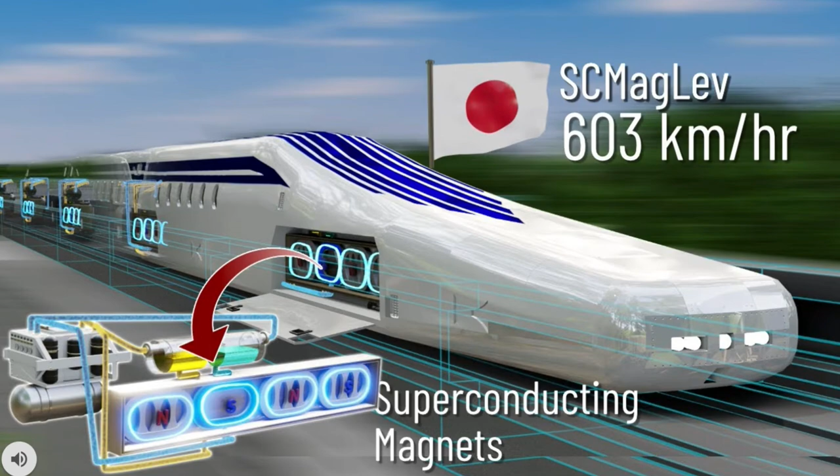On this next slide we have a simple image of a maglev train. This is the SC maglev train, a new maglev train opening up in Japan in 2027. You can kind of see the superconducting magnets and so on. This is just a high-level overview diagram. We'll go into more details on how the magnetic levitation trains actually work in the next slides.

Now we'll answer the question of how maglev trains actually work. Essentially, they have magnetized coils along the track that repel the magnets attached to the undercarriage of the train, and that's what causes it to levitate. The magnetized coils along the track repel the magnets underneath the train, causing the train to float in the air. Once the train is levitating, the electric current supplied to the magnetized coil along the track is alternated at a certain frequency, creating a periodic shift in magnetic field polarity.

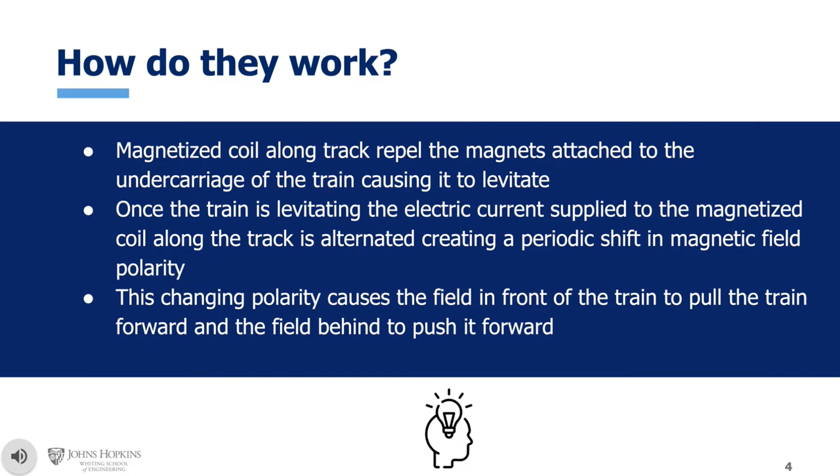This changing polarity causes the magnetic field in front of the train to pull the train forward, creating an attractive force in front of the train that pulls on the magnets on the undercarriage, pulling the train forward. Behind the train, that alternating field creates a force that repels or pushes against the magnets underneath the train. This propels the train from the front and the back, which is part of the reason they achieve such high speeds.

On this next slide, we see a simple diagram of what I just explained. On the left we see the levitation of the train: the magnetized coils underneath the train repel or push up against the magnets attached to the train's underside, causing the train to get pushed upward and float some distance above the track, about 4 inches typically.

Now, on the right, we see how the train is propelled. The alternating magnetic fields along the coil or track pull on the north pole of the magnet on the underside of the train, and behind the train they push against the magnets. This constant pushing and pulling produced by these alternating magnetic fields is what propels the train forward.

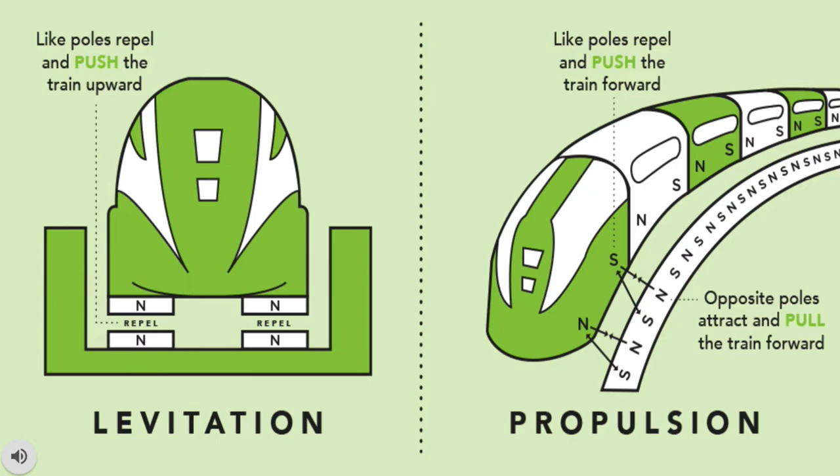Now that we've talked about what a maglev train is, let's talk about some of the positives. First, since magnetic trains operate on the concept of magnetic propulsion, they don't have a motor or an engine or anything like that. Since the propulsion system is electromagnetic in nature, there's no carbon monoxide or carbon dioxide emissions, so it's very green.

In terms of energy consumption, maglev trains are actually much more efficient than traditional trains, and once again that's primarily the result of the fact that magnetic levitation trains float, so they see less friction, meaning it takes less energy to propel them forward.

In terms of noise pollution, once again the train has no contact with the track, and since it's floating in the air, there's very little noise. So for people living around maglev trains, it's actually not as bad as it is for a traditional train.

In terms of the amount of land it takes to set up a maglev train network, maglev trains actually don't require as wide tracks. They only have a 12-meter wide dual guideway instead of the traditional 14 meters required for regular trains.

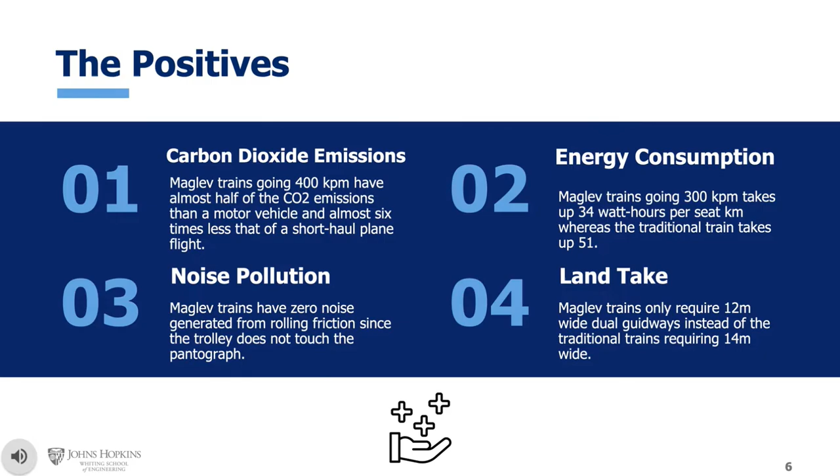Some additional positive benefits of maglev trains from a cost-benefit analysis: since the train floats and doesn't actually touch the rails, the mechanical wear and tear of the different parts on the train happens much less quickly, so maglev trains have much lower maintenance costs than traditional trains.

In terms of comfort, the absence of rolling friction on the tracks creates a very comfortable experience for passengers. There's no vibrations, no loud noises, and so on, making it a very comfortable and smooth ride.

Now, due to the way magnetic levitation trains operate, the chance of a derailment is actually very low, especially in most weather conditions.

This is a result of the fact that the train itself floats above the track. However, the magnetic fields generated by the coil actually keep the train on the track, making it very hard for it to derail outside of very unique conditions or extreme circumstances.

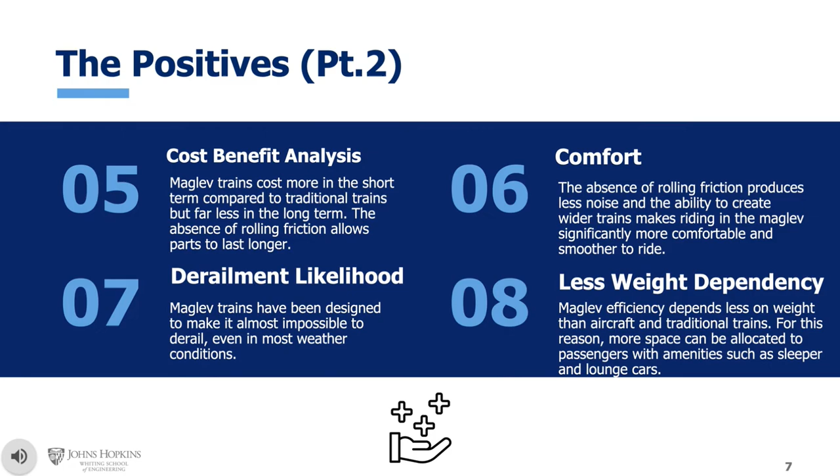And finally, in terms of magnetic levitation, trains have less weight dependency. For this reason, more space can be allocated to passengers with amenities such as sleeper and lounge cars. This is a result of the fact that magnetic levitation trains don't need to stay mechanically attached to a track, right? They can float above the track. This means they don't need to be as heavy in order to ensure there's no derailment. Regular trains have to be a certain weight, or weigh a certain amount, in order to ensure that they stay on the track.

Now, naturally, as with any technology, maglev trains have certain downsides. Some of those downsides include the incredibly high upfront costs for setting up a maglev train network.

In addition to that, there are health concerns. Due to the presence of strong magnetic fields required to keep the train levitating and to propel it, there's concerns about how those might have long-term effects on the health of passengers and so on. A lot of this is still being studied and understood.

The other thing too is we say that maglev trains are green, but they're green with an asterisk, right? Because if the energy or electricity required to operate the maglev train is generated with fossil fuels, then that sort of defeats the purpose, doesn't it?

And finally, with those high speeds that maglev trains can achieve, there's also high risk, right? We mentioned that the chance of derailment and other such things, except in extreme circumstances, is very low with maglevs, which means in general they're very safe. However, because the train is floating and going so fast, in the event of a collision or derailment, the amount of damage and risk to human life is much higher just because of those high speeds and the fact that it's floating.

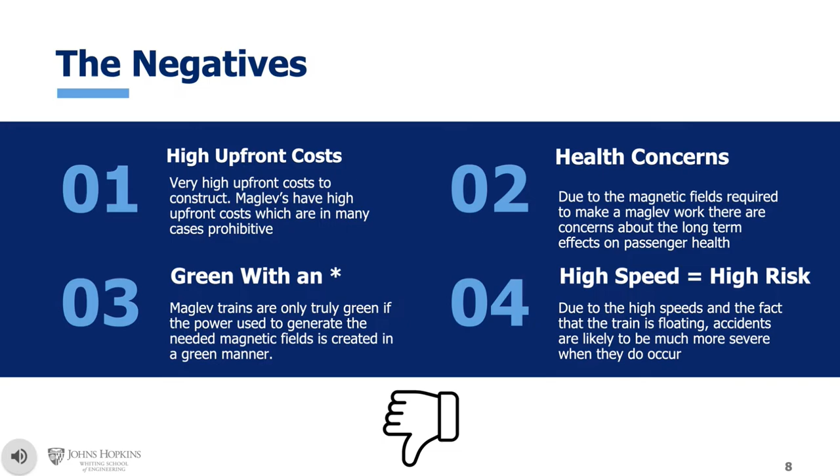So where are maglev trains currently being used? Are there any commercial lines currently operating? In fact, currently in the world there are 6 total commercial maglev trains in operation: 3 in China, 2 in South Korea, and 1 in Japan, with Japan expected to open one more in 2027. So you can see the technology is picking up in Asia, but unfortunately not as much in Europe or the United States.

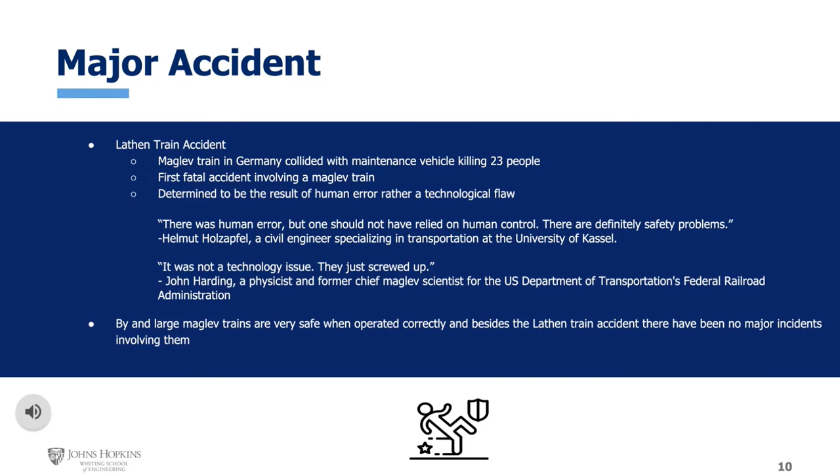It's also important to note that this was not a technological flaw but human error, right? As Helmut Holzapfel put it, who is an engineer specialized in transportation at the University of Kassel, this was human error and one should not have relied on human control in general. It's also important to note there are different variations of this system in Japan that reduce the amount of human error, whereas the one in Germany decided against that, hence the result of this catastrophic accident.

After our continuous and extensive research on maglev trains, we discovered 3 particular hazards that we decided were the best and most beneficial to elaborate on. The first was unexpected power loss. The second was health concerns relating to individuals with pacemakers and how external magnetic fields outputted from the train can affect them. For the third, obstacles ending up landing on the track itself.

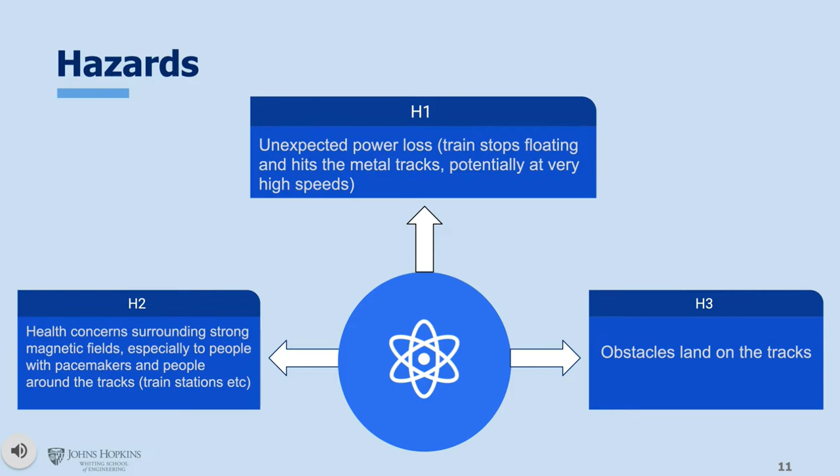If you do a little research, you'll discover many developers of these maglev trains and researchers from different universities have concluded these trains are almost entirely impossible to derail and can withstand almost all weather conditions. But on the off chance an obstacle lands on the track, that could potentially be extremely detrimental to the train—how can they avoid this hazard? We're going to get into these three coming up next.

The first hazard we will discuss today is regarding unexpected power outage occurring while the train is in transport. Maglev trains will still remain afloat even if electrical power is reduced. The electrical current is created between the oppositional magnetic field between the magnets, and that slowly reduces when electricity is shut off—it does not come to a complete halt very abruptly. As it comes to a slow stop, the wheels on the bottom of the train will glide with the track. As you can see in the diagram to the right, it shows how such an event is controlled.

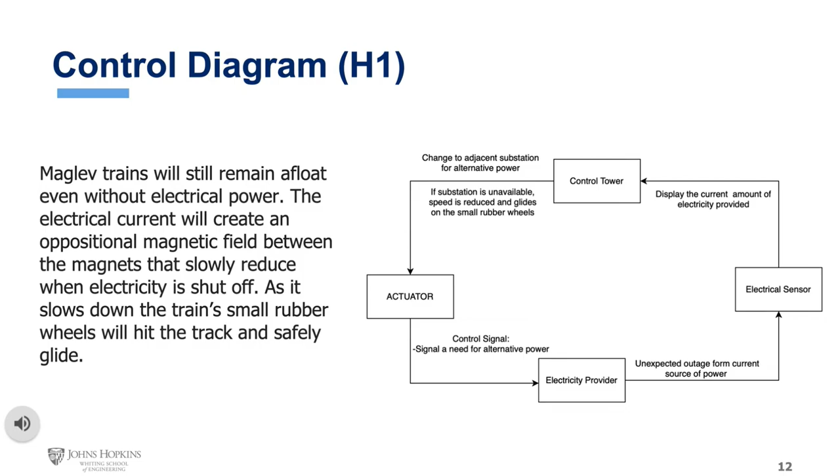So for the second hazard, if a cardiac rhythm device such as a pacemaker comes in contact with an external magnetic field, could it potentially bring a disruption to the individual? Most modern day pacemakers contain a switch that closes if an external magnetic field around 0.9 millitesla is applied. The switch then turns the device to a programming mode with asynchronous pacing. This isn't too worrisome, but it is something to be noted.

Luckily, the field within or outputted from the maglev trains are around 100 microteslas, so it is extremely far from causing a reed switch within these devices. Of course, the makers of maglev still recommend you see your cardiologist and get approval beforehand. And it's worth noting that if your pacemaker is MRI safe, it is almost entirely perfectly safe to aboard these maglev trains.

This is, of course, with the assumption that the train's magnetic field has been thoroughly tested, and that testing situation has been displayed on the right on the control diagram listed. You can see how the human operator in the control tower detects the magnetic field and determines if it is fine or if it is detrimental to individuals with pacemakers, and how they will proceed forward.

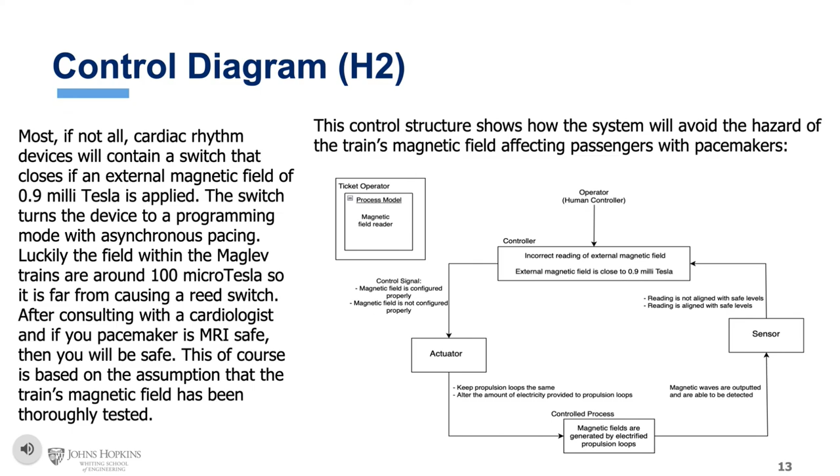Now for the third hazard: if an obstacle has landed onto the track on which the train is moving, how will the hazard be prevented? There are current sensors and video cameras installed on all maglev trains that detect if an obstacle has been placed onto the track and determine if it is severe enough to result in the train stopping or continuing towards its destination.

As you can see on the right, it shows the process on how that is conducted. And on the left, you'll see from fellow civil engineer from the University of Kassel, Helmut, who said any obstacle on a maglev track presents a problem - the heavier the obstacle, the bigger the problem. It's just simple physics. It's completely true.

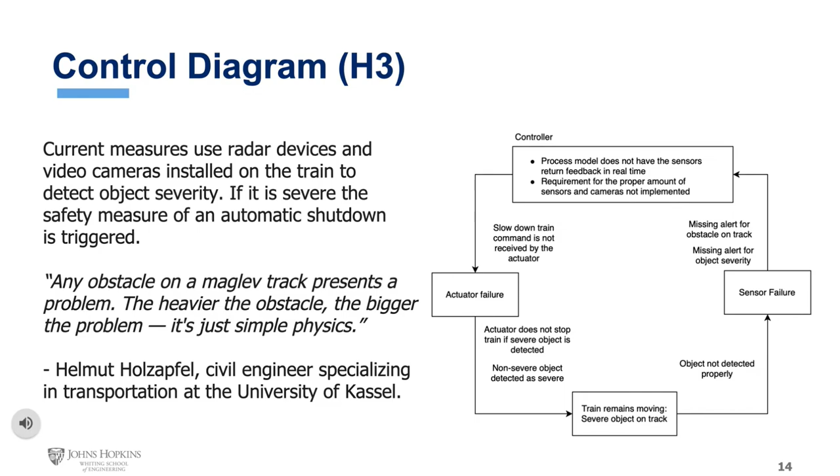Even though most researchers and developers of the maglev train are extremely adamant that it's almost impossible to derail this train and that it can withstand almost all weather forces, there still is the possibility of an object landing on the tracks. And if that very rare situation occurs, there still needs to be a plan in place on how to detect and work around it.

One of the biggest aspects of the production for these trains is its autonomous features. Even going down to how it accelerates and decelerates, it is manned by an external control tower instead of having individuals within the train itself. As you can see on the right-hand side for this activity diagram between the control tower and the maglev train itself, it shows how it is determined to either accelerate upon departure or decelerate upon destination arrival, and how that is done thoroughly and safely.

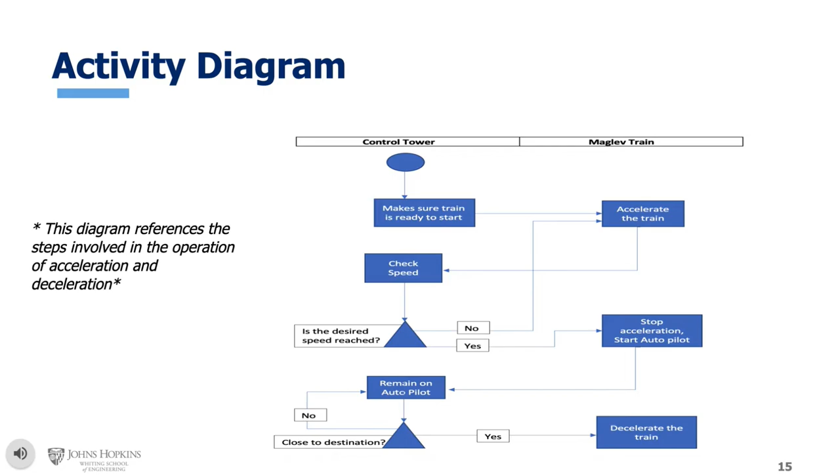The socio-technical impacts involved within the development of this maglev train are nothing shy of complicated and extremely intricate. It goes all the way down from who is going to be funding this project, whether it's a government entity or private entity, down to getting approval from the government in which it's being produced in, if the people where the town is being produced actually approve of it, and the infrastructure needed to go forward with it. So there are many aspects involved.

We're going to use JR Tokai's Tokyo to Osaka maglev line, for instance. The people of Osaka were all happy by majority vote. They not only wanted the train to be developed, but they wanted to rush the process of developing it.

During the whole development process, the executives of JR Tokai were in meetings with government officials on a constant daily basis, going through production details, making sure that political entities weren't going to be a major influence in the process of its development, and understanding how they can use the fiscal spending of the government towards their own benefit.

As far as the socio-technical impacts go for the operations of the maglev train once it's been properly developed, there needs to be constant feedback on all levels within the hierarchy. The train itself needs to be providing constant feedback to the control tower. The utility company that provides electricity to the train also needs to be providing feedback to the control tower. This is extremely important, as the control tower decides whether the train is accelerating or decelerating, and if there need to be any solutions or maneuvers in the event of sudden power outages.

So constant feedback is extremely important throughout the entire system. Let's use the Shanghai maglev train for a quick example. It is currently the world's fastest and oldest commercially used train in existence. It runs Monday through Sunday for majority of the day and has 6 maintenance checks that are around 15 to 20 minutes apiece. Now this line from city to city has a separate track that takes it directly to the maintenance facility and determines if a quick maintenance check is sufficient, or if something needs to be fixed and the next trip needs to be delayed.

The major benefit of using maglev trains in this situation is maintenance isn't as needed as traditional trains because of the lack of rolling friction that reduces the need for constant repairs and replacements over time, because the magnetic and electrical forces producing a levitational field for the train. The lack of rolling friction is an extremely beneficial aspect to the maglev trains and reduces the amount of maintenance and maintenance teams required to keep it up and running.

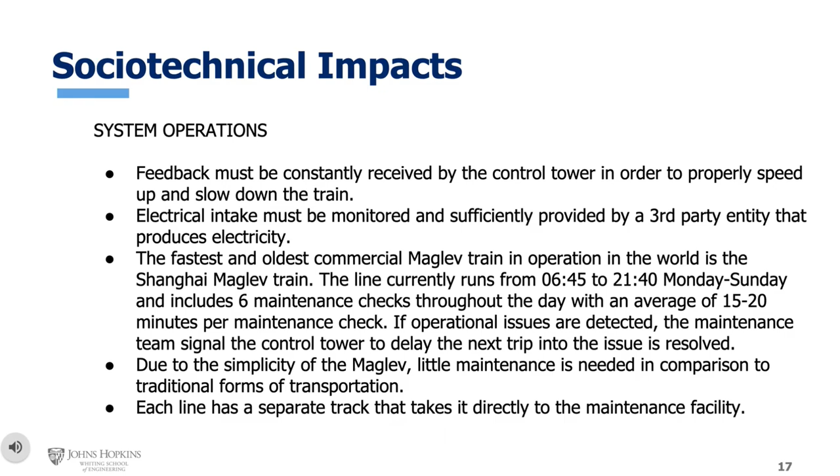So the future possibilities are extremely vast with maglev trains, especially in the United States. We need to break the chain of low expectations that we're currently dealing with regarding maglev trains and realize that other countries like Germany and Japan are using these trains to extreme benefits.

The whole purpose of maglev is to remove millions of people from their cars and fight climate change while doing so. There was a study done by NASA that showed the CO2 emissions in New York City from 2015 to 2019 and how it almost was reduced to around 95% during COVID. Now this is not to say that the construction of the maglev line will completely remove the pollution in comparison to that of the COVID era in 2020, but it does show the improvement there can be with a significant amount of car reduction on the roads.

So maglev can 100% be a solution to this issue. And it's currently known as the Internet of Trains, a newly coined term. It's completely fully autonomous. And I think future possibilities, not only in the United States, but in Japan, Germany, and other countries, as technology becomes more evolved with artificial intelligence and machine learning, there will be more sensors, predictive analytics, and big data integrated into the maglev system that could almost reach a 100% reliability rate. This type of central management system will maximize the amount of passengers, with operators only needing to simply alter the arrival and departure times, while the machine itself will take care of the rest.

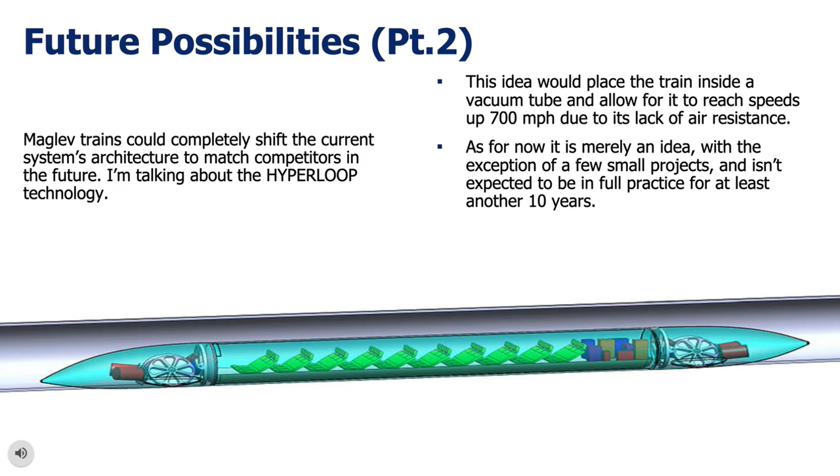So in terms of safety enforcement, or kind of what's going well, or how are these maglev train companies sort of accounting for the different hazards present, it was notable the extent to which they've really thought about how to mitigate some of the hazards that we talked about in this presentation, and some of the hazards that we perhaps didn't touch on.

As part of this presentation, we thought it made sense to include screenshots from some of the relevant sources so that we could make it part of the discussion. And so in the following slides, we'll go over some screenshots regarding the different safety features present on the newest maglev train that's going to be in operation in 2027. But I want to note that these features are also present in some form or another in current maglev trains. So without further ado, let's jump right into it.

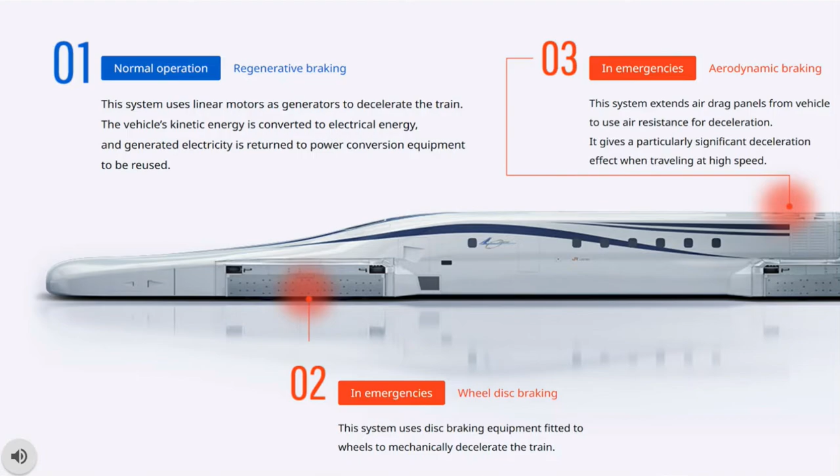In the case that a particular substation suffers an electrical outage and the train is not able to receive power from that substation anymore, there are alternative substations that can keep the train propelled or keep it levitating and keep that coil on the track energized.

As we touched on, in the event that all substations go down or the power just isn't getting to those coils, the train has rubber wheels to land on softly, and it can brake using the standard wheel disc braking that's common on most trains with mechanical coupling to a track.

Next we'll talk about a hazard we didn't really cover: what happens in the event of an earthquake or something like that, and the train starts getting vibrated or shaking. In this situation, even though the track underneath it—those magnetic coils—will be shaking because it's on the ground, due to the principles of electromagnetic induction...

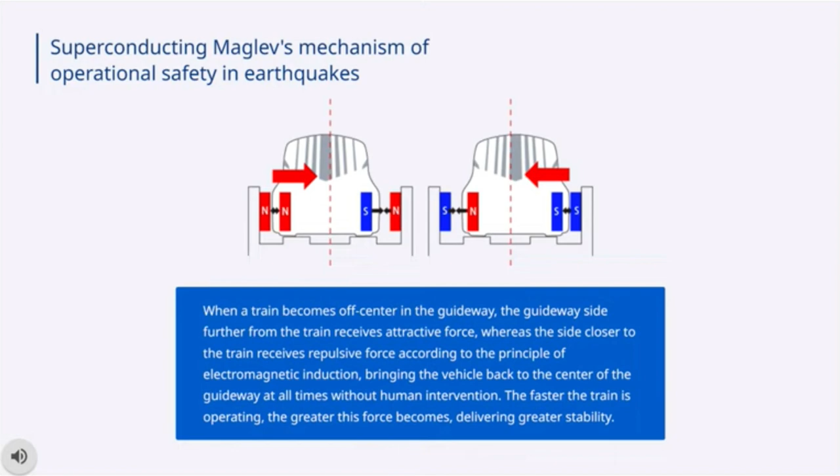In reality with maglev trains, there's actually a magnetic force keeping the train on the track at all times, which gets stronger the faster the train goes.

Now we'll take a look at gaps in safety regarding how safety is currently enforced on maglev trains, and how these companies have attempted to address some of the hazards we've already talked about.

It was notable that in studying this topic, we did not really come across any major accidents other than the incident in Germany, which we discussed earlier. That's notable because the oldest commercial maglev train in operation, the one in Shanghai, has been in operation for 20 plus years with no major incidents.

This fact does align with the safety analysis done by engineers and regulators, where maglev trains are consistently shown to be significantly safer than standard trains.

Despite this fact, maglev trains have seen very little adoption outside of Asia, primarily due to their high upfront costs and lack of regulatory certainty outside of Asia.

Maglev trains are, as we've mentioned, extremely expensive to set up front, with one estimate putting the cost at $50 million per mile at the low end, and up to $200 million at the high end. Maglev trains require significant upfront investment, and many countries have not been willing to put up with that high cost.

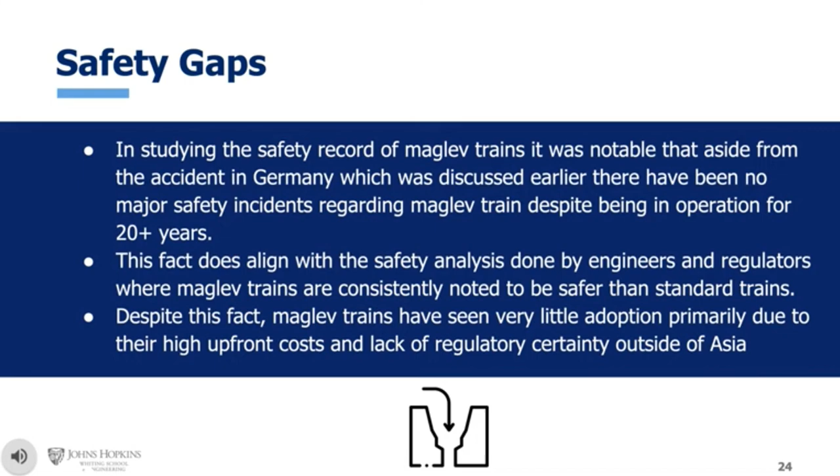As we wrap up this discussion on the STPA process used in maglev trains, we're going to address some takeaways that we can apply.

Going through this entire process, it's easy to see how much safer and more efficient maglev trains are compared to traditional means of transportation used in the world at the moment. It shows how it can significantly reduce the CO2 emissions outputted by trains, taxis, cars, and most forms of transportation used today.

One of the biggest things we need to understand is that we need to break the chain of low expectations that most countries hold in talking about maglev trains. We need to understand that the short term might be expensive, but the long term will be extremely beneficial.

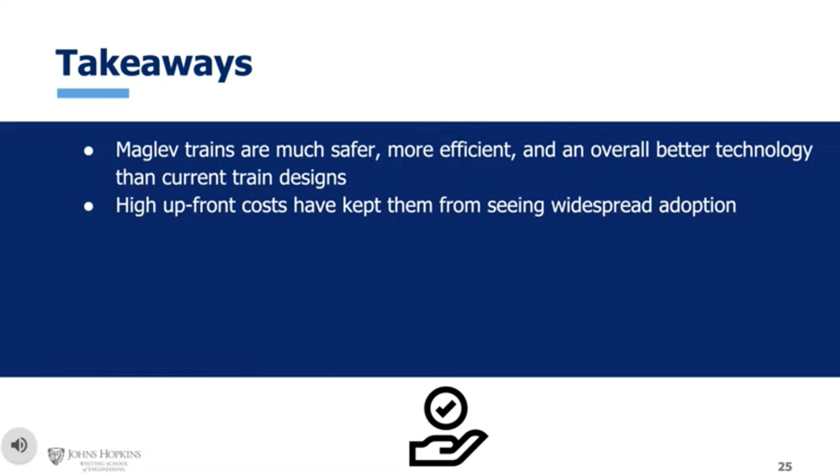For that reason—and it's the sole reason there's been many delays on these projects—the upfront costs are extremely expensive, and the infrastructure creation is extremely elaborate. But it has been shown in Germany and Japan that the project does work long-term and is extremely beneficial to the people residing in those cities.